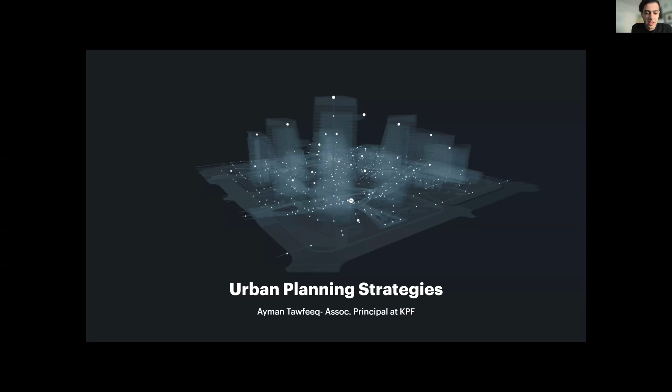المحاضرة راح تكون focused على الwork. So I'll talk about the project and the practice at KPF.

Our practice and the work I've been engaged with is design work, usually done in New York and the London office, where we have the larger offices, and the rest of the offices in Seoul, Shanghai, Hong Kong, Berlin, San Francisco, and Singapore. These are smaller offices. We do work with them closely on coordinating site visits, client relationships, and so on.

On one hand, design in our practice is focused on context and driven by local conditions. However, we found again and again that information transfer and learning is important to bring into other contexts as well.

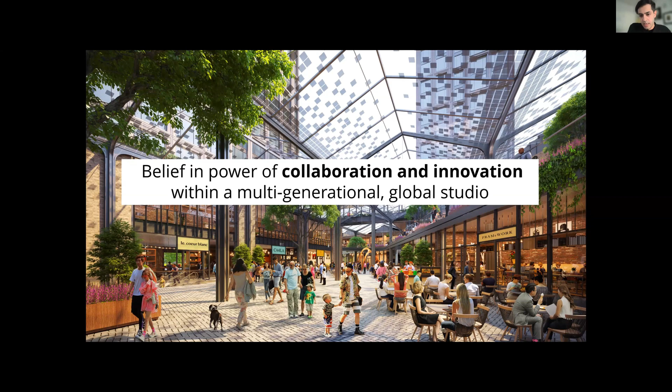It's important — we are 700 to 800 people in a global office. 300 of us are in New York City, and the others are split across the other offices across the globe.

We believe in innovation in the way we work on projects. There are two parts to the way I want to cover this lecture: the analog, or more intuitive approach to design, where ideas always come from a sketch, and that sketch is driven from our experience, our understanding of the practice, and our precedents library.

And then the other part is the more analytical, data-driven scenarios that we use to come up with iterations. Also, as an architecture firm, I was able to engage with different typologies early on.

When I began the practice, I worked on hospitality, residential, hotel, offices, and retail, and this understanding of how these different typologies come together in terms of depth and width, where the core is located, the efficiency of these different programs, and the needs for each program help us build our understanding of how to arrange things in the city.

In the firm, I work closely with the environmental performance team and urban interface team, where they develop tools that help designers like myself efficiently and intelligently work on cities and do initial studies and analysis to come up with a solution.

It's also very important, in developing these cities, that we practice and advocate for mixed use and multiple scales. This comes from our understanding of the DNA of buildings and how knowing these elements can come together to form a space, with always an interest and push toward creating a livable place.

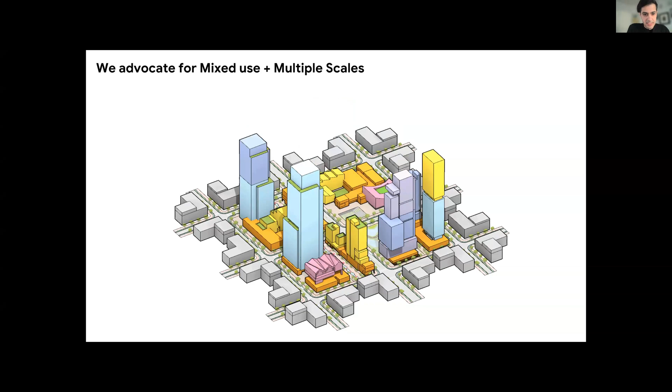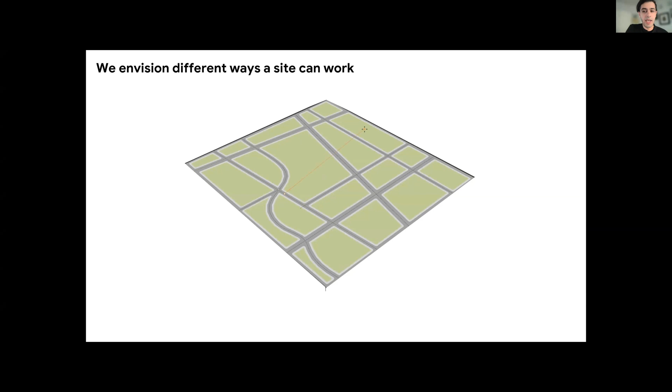Among these tools, we work on different ways of approaching the site. We stay flexible in how we derive ideas by creating an iterative process, like you see in this image, where there are many ways of engaging with the site.

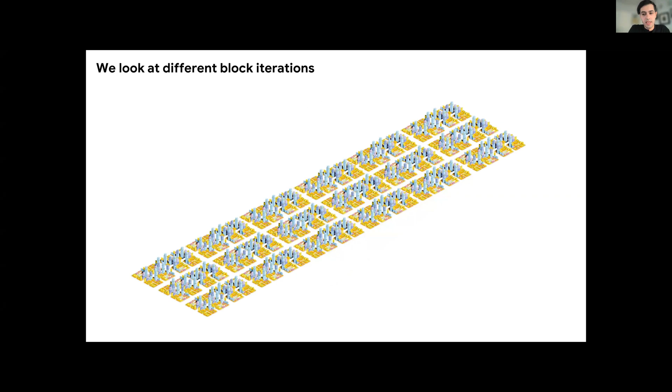Through this early analytical study, we come up with options, and that's how we tend to engage clients in discussion. It's also how we discuss internally as a team when reviewing these iterations.

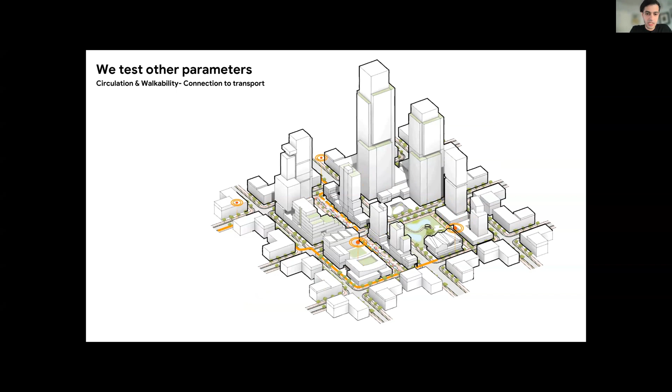Another parameter I want to highlight is, in creating a livable place, how do we create a place that is walkable. We look at these in numbers, in radiuses, and we make sure we bring these to the table in every project to the client, and also through our planning responses.

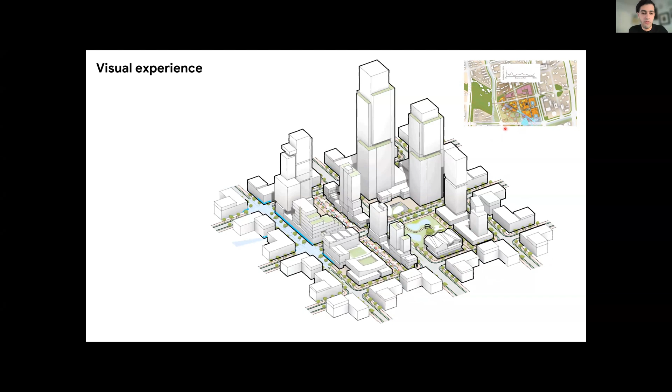Let me highlight this - it's really important that we create a space with a variety, so that as you move through the space, you see more. That's important.

Aside from and parallel to all these studies, we understand it's important to work contextually and engage human scale at the beginning of projects, and in how we shape these neighborhoods.

This always comes from site visits and field trips. We create a palette - in this case, on the right, more industrial, looking at different windows, the structure, and the different artifacts we found. In another location, we look at materiality, textures, the feel and look. That's how we come up with a palette that defines how we engage with these urban spaces.

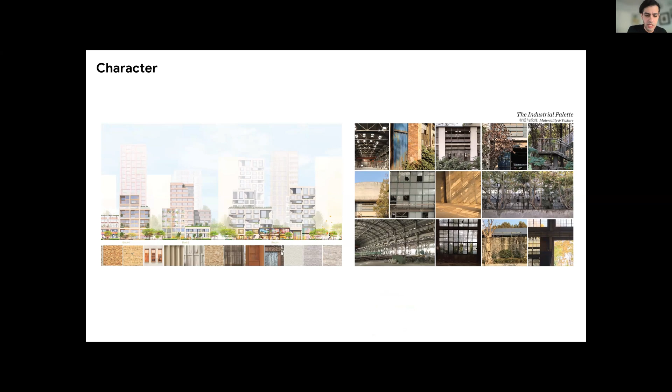It's not just about looking at analytical data, but really engaging human scale, culture, and identity into this work. Another example - I was working on a project in Baltimore where we looked at artifacts: the rail track, the chimney, the spiral stairs we found interesting from the warehouses, and also the color.

All of this becomes important in creating this palette, something we can always go back to - almost like a guidance, a catalog that we use in the way we shape these cities and neighborhoods.

I think I went really fast, but going directly to the planning responses for these three distinct neighborhoods, I won't have time to describe all these examples and details of how initial concepts come across, but I'll focus on how we think about planning, using tools, and also our intuition and understanding of these places.

So starting with Downtown West, I'll cover these examples - some I worked on directly, and others are just examples we use as part of our workflow that I want to share with you.

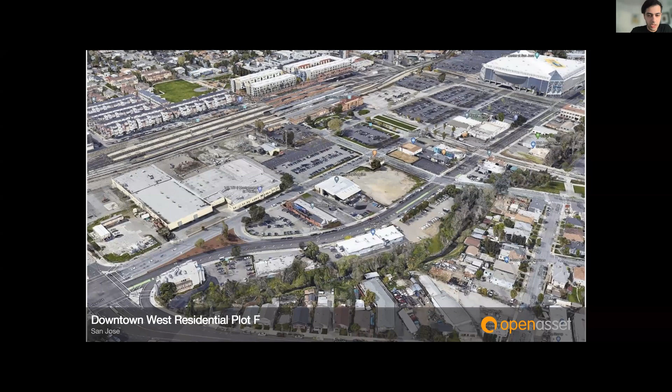In our work in America, and as part of this lecture, I want to talk about this example in downtown West in San Jose, California. It's an 80-acre redevelopment, a case study that we do a lot in our projects in the periphery of cities in the U.S., where these places want to start to be more mixed use, revitalized, densify, and create a destination for people to come to.

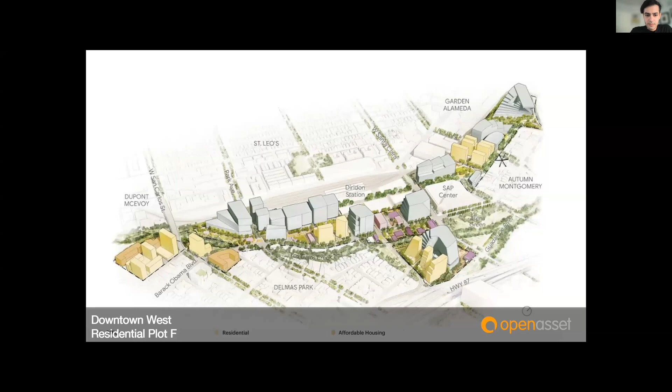The original site plan was done by SiteLab, so they laid out the master plan, and KPF was hired as the district or precinct architect, bringing the planning further toward completion and engaging other consultants within the project.

So like I said, we always start, sometimes with site visits, where these initial ideas come from photos we take on site, looking at the different textures, materiality, artifacts, and things we get inspired by, collage, sketch over, trace, and look at the scale of how these things are engaged, height, and so on.

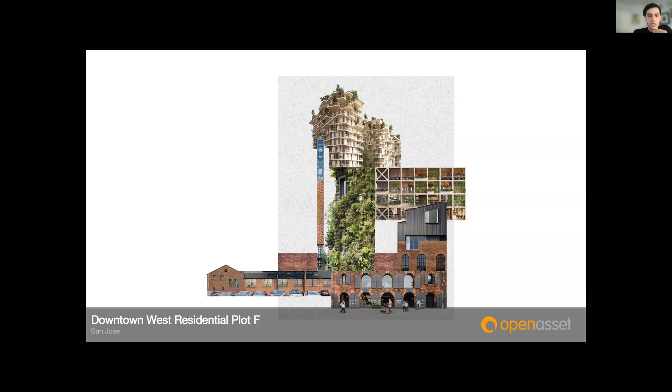For us, these then come later to being pinned up and critiqued by the team, looking at how we transform these cities from something more constant and monotonous in language to something more diverse, with a variety of spaces that people can come to and engage with.

So we start with this understanding, with sketches, ideas, and diagrams, and this comes from our experience. As a firm we work together in teams, so a lot of people have different understanding of typologies that they can advise on the projects and work with our main design team.

Sometimes before that, I'll map out the existing site, looking at Google, GIS, and open resource maps to discover areas of opportunity, with the goal of how to allow this new development to engage well with the surrounding context.

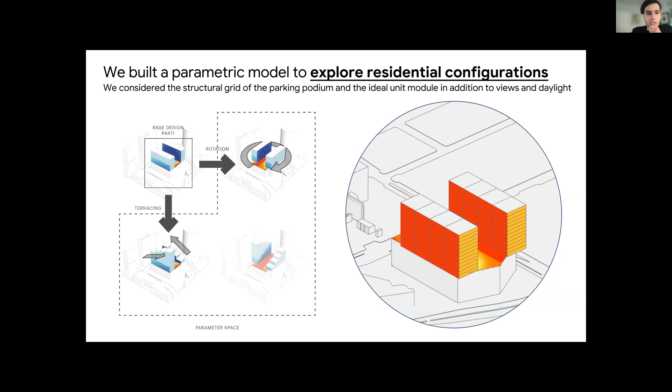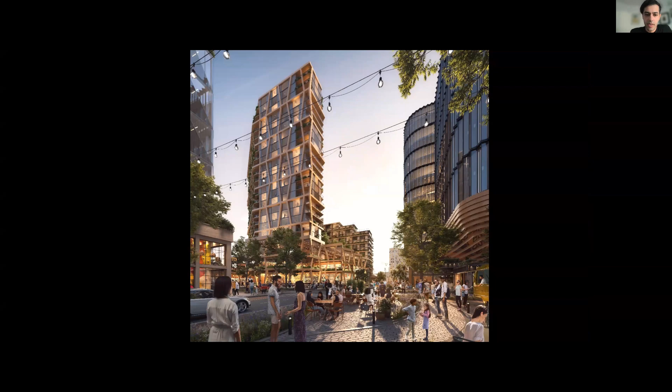All this will lead to this image where we're looking at intimate retail, a place that's open, with open space, engaging people, bringing people together, and a mix of scale. All that is also influenced by the culture of the place, the colors you see, the pavements, what this place wants to be in the future. So you look at all that together.

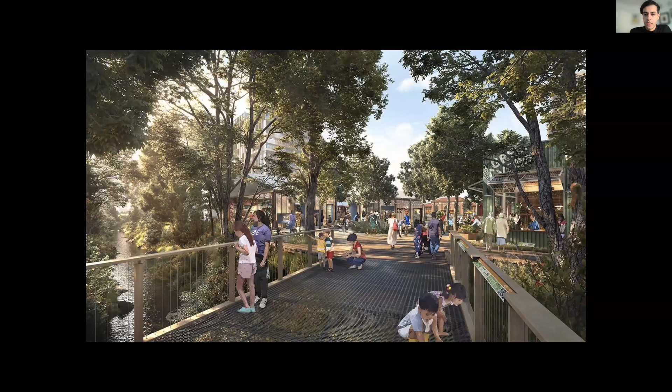And of course, it's very important to integrate green space and create a sustainable place for people to live and live long. These projects in the office, as you see, are really massive in scale, and many of them will be built over decades, one, two, or three.

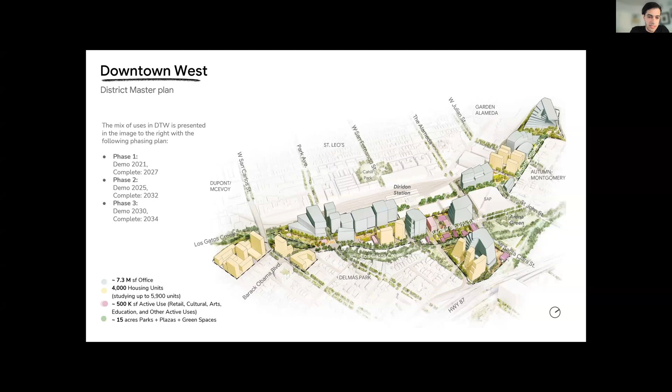So archiving the information and making sure that all these initial ideas that start the project can continue throughout the phases is a challenge. This also involves a lot of consultants, hundreds, and in many cases more consultants are being onboarded over time.

So for us, it's important to use tools. The office started using a platform called Scout, where all the information from us and from other consultants can be placed, making sure it's all up to date and engaged with the timeline, so people understand where the project is at any time, and stakeholders can track the project easily and understand the changes.

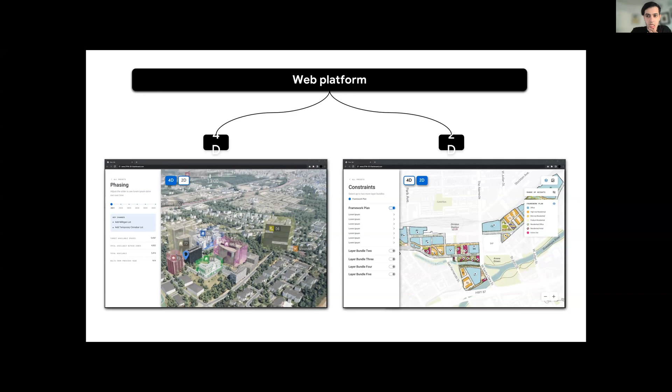It also helps onboarding other consultants, so that's a very important aspect in our practice. It comes in handy, especially creating hundreds of layers of diagrams and zoning, since regulation policies and zoning change throughout the years. Making sure we understand where these things started is key to bringing these projects to life.

That's something you see in layers placed on this web, and this is another layer to it. In some projects, we were able to engage with the city, with the people, with the locals, in town halls and gatherings where we use this platform to engage the community.

You see here that toggle for density, building shape, or thermal analysis. By raising or bringing these toggles down, it helps the community understand the impact on, for example, shadows and open spaces. What does it mean to densify? What does it mean to lower that density? It helps them be part of the decision making.

This is really important in a lot of projects in New York City, projects in Hawaii, and other projects in China. We make sure people take part in it as much as timeline allows for it.

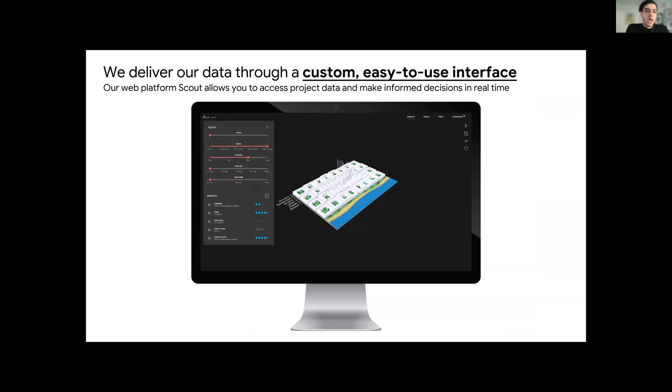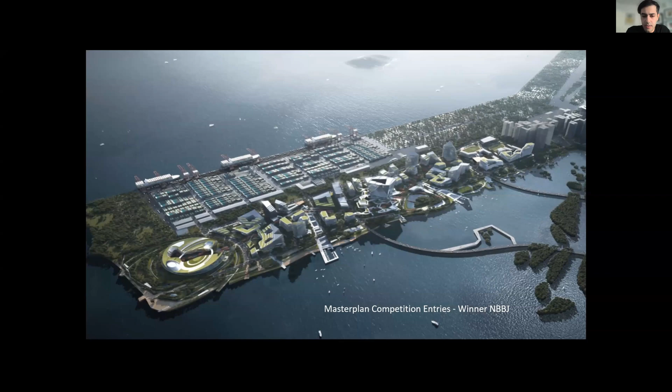So this is the delivery in some cases, you see it in this platform, and in other projects in Internet City in Shenzhen, China. NBBJ won the master plan, and KPF comes in to engage on this one block and create a study for the block within this larger master plan.

What you see here is this promenade that was initially put in the master plan that we have to respect and work with, which is important to connect the different blocks of this master plan.

It always starts with an initial sketch. You see in this funny sketch on the left where the red is the promenade. The idea was to bring in views toward the water and create a central hub, a courtyard, almost like a stop point within each block where people can come together and engage.

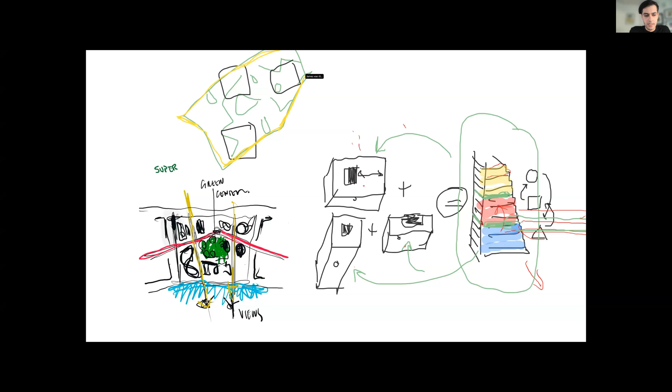This is a parti diagram that leads from the sketches, and you see the hub, the connectors, and the forest. Then we also have to look at how these vertical buildings can be climate responsive and be protected.

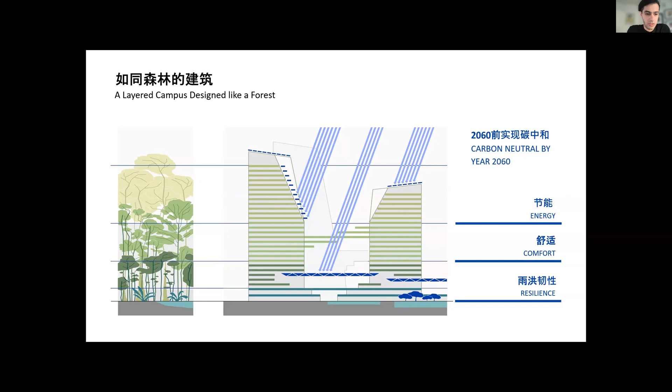We're working in an environment where in Shenzhen it's humid, it's hot. It's important to protect these facades and look at all the layers of energy, comfort, and resiliency, depending on where it's engaged in context. Flooding in a lot of cases in China is important to pay attention to and work with.

Then this later becomes a 3D study, coming with a simple massing first before we start manipulating and changing it. These studies and analytical tools start to help us infuse more intelligence into shaping these designs.

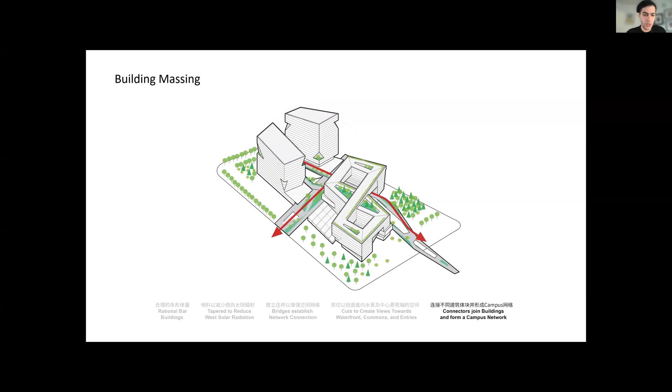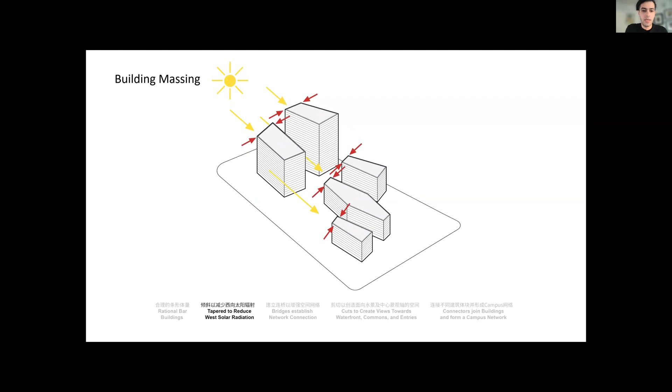If we want to create open space, we know it's important to create these open spaces. These tools help us decide on the location and direction, creating a diagram that is more than just an intuitive response. It's something thought out.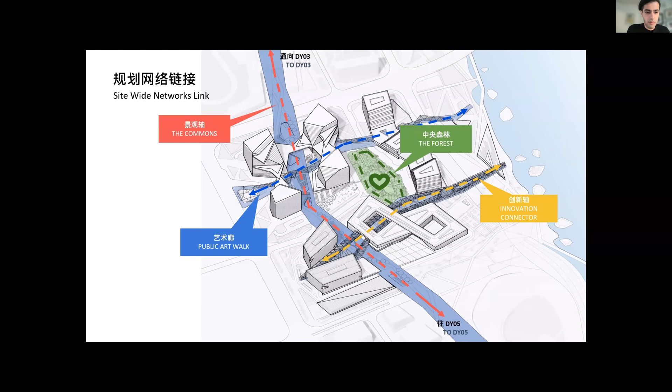You see the commons here breaking through the massing, the forest, or that urban hub in the middle in green, and there is the public art walk, we call it, that intersects with the commons.

This is another diagram showing the wind, how it's engaged. It's coming from the east and the northeast, so it's important to open the buildings from the water toward the water, and that also influences a lot of the shaded courtyards.

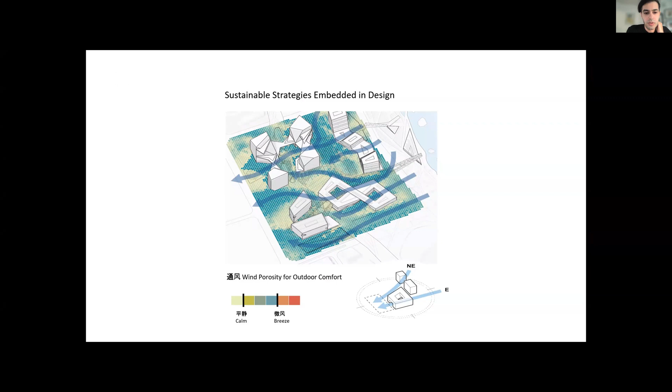But it's more analytical, and we use parametric tools to come up with these, working with other teams within the office that are focused specifically on developing these tools.

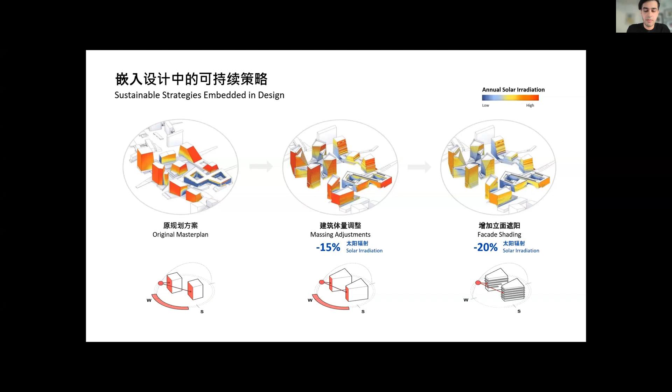Another response will be on how to improve these massings from the initial original master plan, through use of shading tools and thermal analysis to protect these facades. Then we work on shaping the facades, orienting the buildings to come up with the right results.

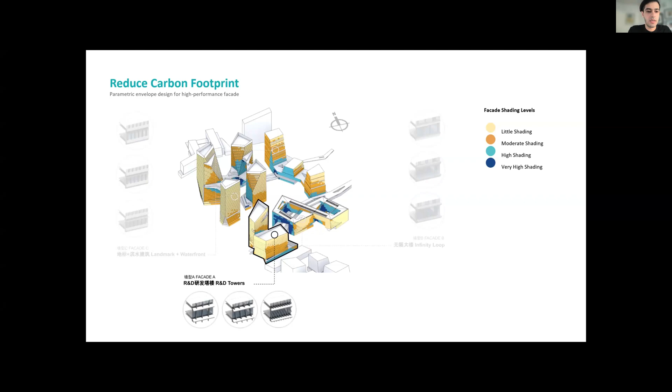We look at how we then look at the facade itself and define the different wall types in terms of using canopies, screens, and different glass coating that will allow us to protect the building's interior from these high temperatures.

Another way of looking at this is we want to create a space where it's comfortable for people to walk outside. So then we had to introduce a canopy based on the shadow analysis, understanding where the shadow hits the ground throughout the day, which influences the pedestrian walkways and the location of these canopies.

A lot of projects today in the Middle East that I work on involve more than just a canopy. We have to introduce environmentally friendly tools to bring breeze, and sometimes create spaces with water to change the temperature locally within different spots on these master plans.

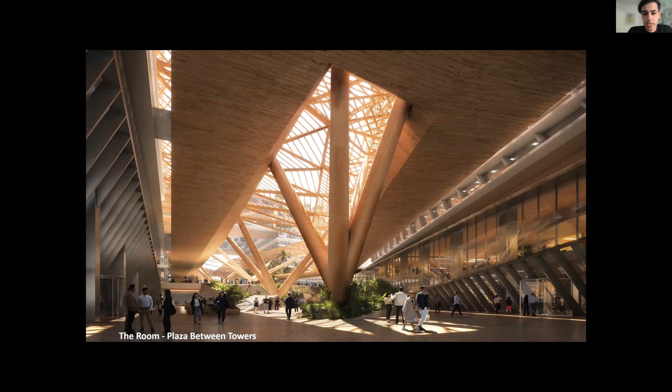This example is in China. It leads to an image where this is the first view you'll see at the office drop-off, and we wanted to ensure that the space is welcoming and inviting throughout the year.

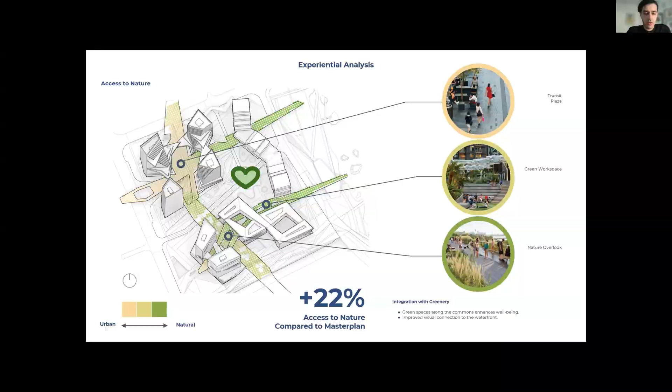Two more minutes, it runs fast, but I'll walk through. This is an image of how we integrate green spaces, and we study open and closed spaces.

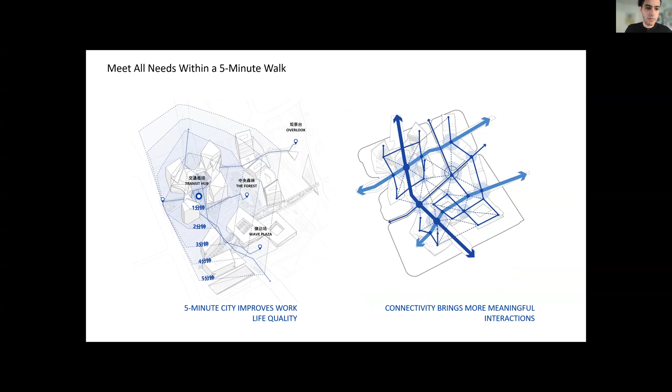I don't know if I will be able to cover everything. This is a 5 minute walk radius, it could be drawn as a radius, or it could also be just measuring the length of a line, a polyline.

In a lot of these projects, we think of water and the concept of scarcity. How do we collect water on these horizontal surfaces, on the roofs, on the plazas, open spaces, rain forests, rain gardens, and we measure that in numbers to understand how much water we have.

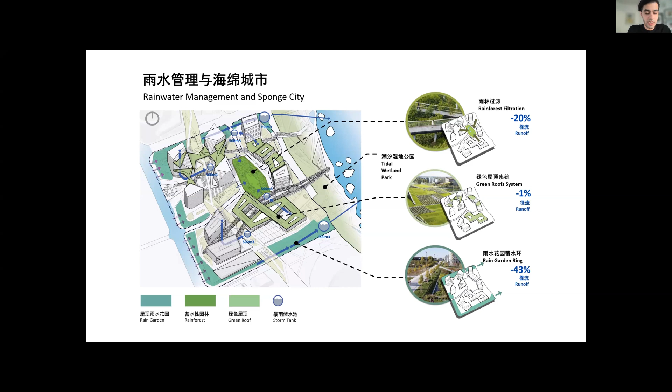For example, in our project at Hudson Yards, this has been executed where you collect water and use it not necessarily as potable water, but as gray water for less important uses, not for drinking, but for use in the restrooms, kitchen, and so on.

I think I will have to stop here since it's already 30 minutes, so I won't be able to tap on the Covent Garden project, but I'll stop here for questions.

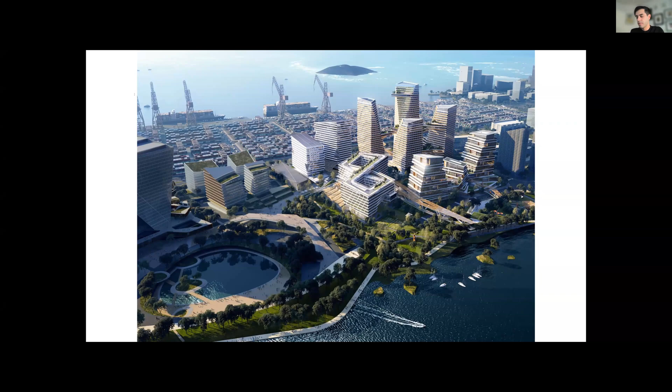In the planning of these cities, some projects are just plain land, blank space. But in a lot of projects I've been working on, there's a whole talk we can discuss on adaptive reuse and the idea of how to intervene with an existing context that has history, has culture, and how to carefully and surgically engage that.

I think it's important, and that will have a whole talk. Paying attention to that and documenting what really exists is the first step toward designing the project. In a lot of projects in the office, and my previous project, I would share that in a whole other lecture. It was really about starting with an existing condition, and that has to be treated a whole different way. Preservation is a sustainable practice, and we are always advocating for that.

I think it's important, and I would agree that we need to pay attention to it. But that will be another talk, maybe the next time I'll be talking about that.

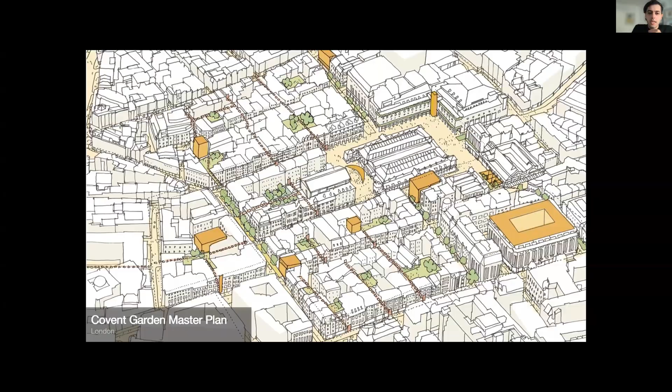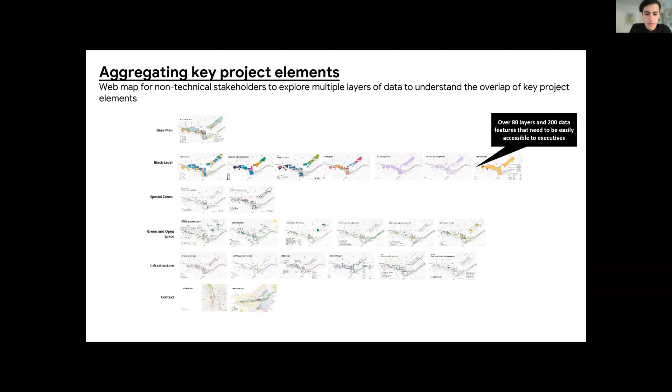I don't know if I tapped on this, but from initially how we started the talk, we believe in the idea of diversity and creating something more of a mixed use throughout different cities, especially in the project in San Jose and a lot of projects in the periphery of cities in the US, where this zoning has been changed. Recently in New York, they've been looking at introducing residential, because we have a challenge in affordable residential.

So these changes are important, and zoning has been changed based on the needs of people, whether it's just to create a destination and a place where people can engage, or something as important and vital to being in a city as affordable residential. Right now it's really hard to live, the city is moving toward being less affordable every day. So the city is constantly looking at changing this zoning, and it's very important. We are working with that, and we always like to engage because we advocate for these changes as we find necessary to continue the concept of livability in cities.

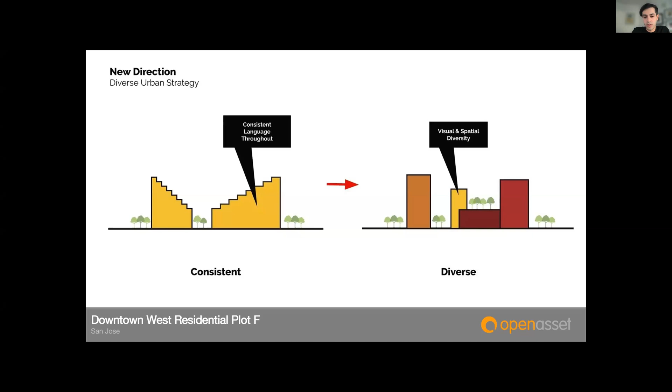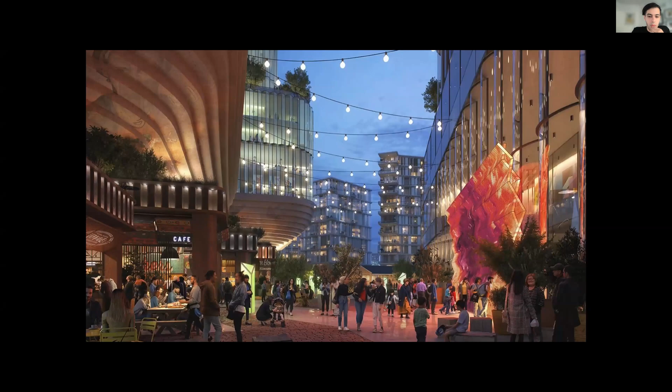I think this is one way. I showed another way where we are using our Scout platform, we were invited by Google to create this platform. I showed it somewhere in this project, where we engage them while we're planning in a work session, where they were playing with these tools and trying to come closer to our understanding of how these cities should be shaped based on the concept of open space, the concept of creating spaces that are shaded, and so on.

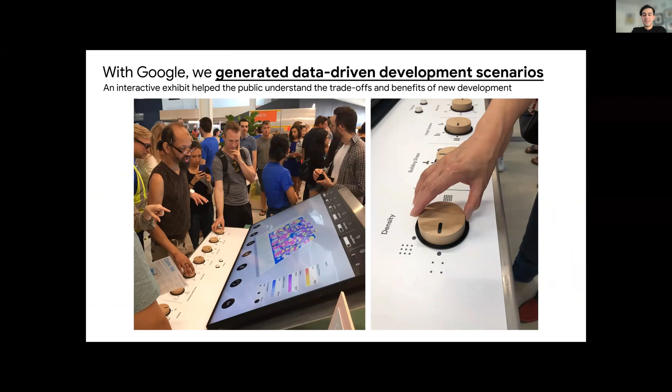Thank you again. Thank you, everyone. Have a good one. You too. Shukran, Zina. Bye.